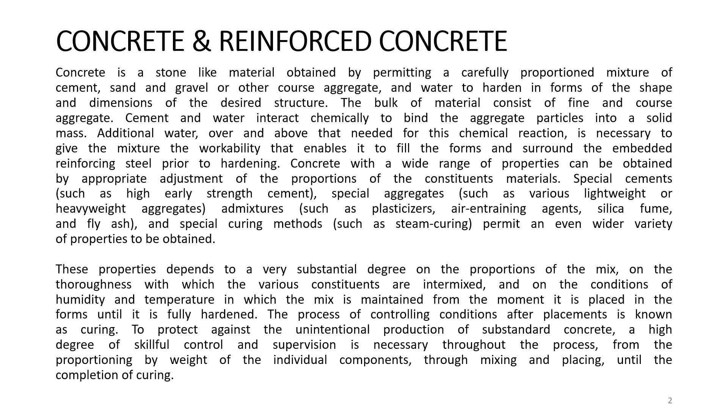Next, you know that concrete is weak in tension. That's why we will combine steel with concrete to take care of the tensile forces, and the steel reinforcement will be placed where tension will come up in the structure. Steel is a very high strength material, good in tension and also good in compression.

We will take care of the compression forces by concrete, and the tensile forces by the use of steel. But steel can also take compression, so when we need smaller sections, we will use steel in both the compression zone and tension zone. We have very high strength steel nowadays, starting from grade 60 and upward, so we will be taking advantage of these two materials.

They will combine together to make one member, and act in such a way that in the tension zone the steel will help, and in the compression zone the concrete will help; if we put some steel in the compression zone, that will also take care of compression. So we will use both materials wherever we need to take care of forces and stresses like tension and compression.

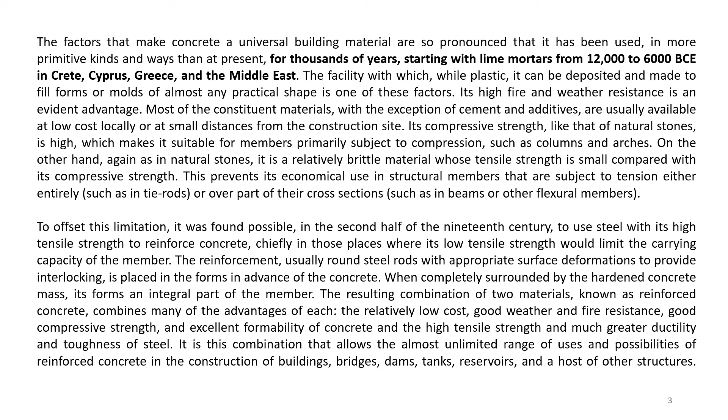In designing any member, we must know the loads. What load will be coming in this structure? There are load tables in the book. The author has given a long list of loads for designing the different structures, and I have chosen some of the important loads from that table. You can go through the original table in the books and see there are many items and many details of the load calculation, but I have picked up some of the major and important types of load with which we

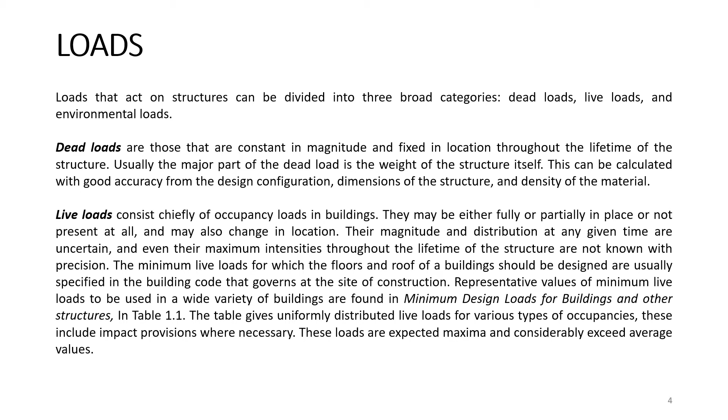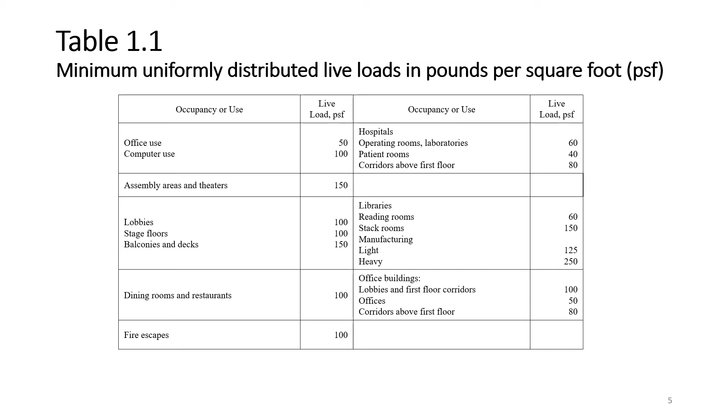will be designing structures. Normally the load will first of all be coming to the slab, and from the slab it will go to the beam and also to the column to foundation. Whatever it may be, a list is provided here from where you can get normal loads for common situations. This is given in table 1.1. There are 2 pages, and you can pick it up. Now we will go on.

Design basis. Previously, when we were designing in the working stress system, stresses were taken at a lower value, and loads were given as the exact load, and the calculation of moment and shear was on the basis of the original load. Nowadays, the system has been changed to strength design. Strength design means we will be increasing the load to give a factor of safety, but we will use the ultimate load of the materials.

Previously, the strength of the material was taken as part of the final crushing strength of concrete and tensile strength of steel. Nowadays, we go for the ultimate capacity of the material, ultimate capacity of concrete and ultimate capacity of steel. But as we go for higher strength, the load should be increased to give factor of safety. We increase the load and we take the full strength of the materials. By increasing the load from the actual load, we give the factor of safety there.

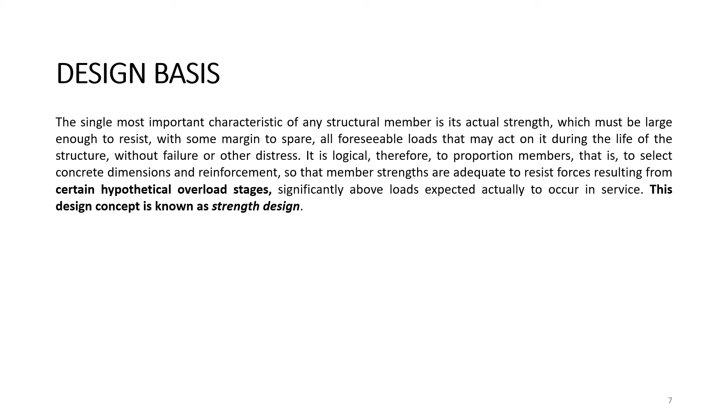In this way we design, and this is known as strength design. Strength means the full strength design. We use full strength of concrete and full strength of the steel reinforcing material, and from the probable load we increase it by some factors depending on the nature of the load, like live load, dead load, wind load, earthquake load, etc. Each of these loads have different factors. Live load is given a factor of 1.6, dead load is given a factor of 1.2, and wind load, etc. are different factors above 1. In this way we increase the load value from the actual load to get the factor of safety in the structure.

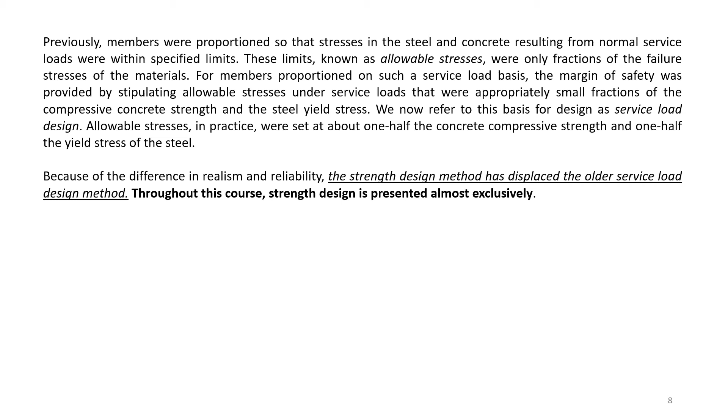In table 1.2, the exact values of the load factors, how much load will be increased for dead load and how much for live load. In the table it's written that for dead load you have to multiply it by 1.2 and live load you have to multiply it by 1.6. And if you have only dead load, then you have to multiply it by 1.4, and like that the other loads are given here for live load, dead load, wind load, snow load, etc. In normal practice in our country and in this course, we will mostly use the dead load and live load only. We will not bring in the earthquake load or wind load, because at this stage we have not learned about those magnitudes. Therefore, we will be limited to 1.2 dead load and 1.6 live load only.

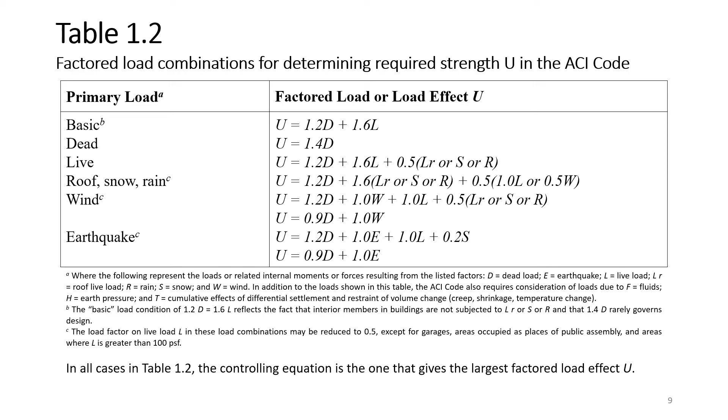So depending on the nature of failure, they have adopted a factor of safety, because failure in tension, failure in shear and failure in bearing are quite different from one another. That's why in bending they have given 0.9, in bearing they have given 0.65, and in shear they have given a 0.75 factor. These are the strength reduction factors. Whatever strength we get from the dimensions and the other properties of the material, you have to reduce these values by these factors. While working on problems and designs, we will refer to these factors and use them properly.

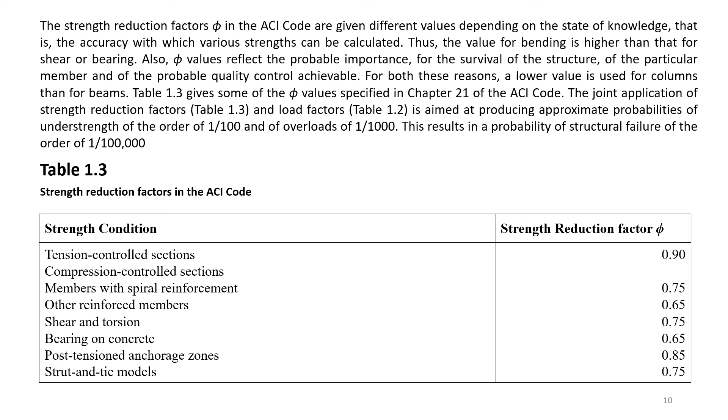For this course, we will be following Design of Concrete Structures by Nilson, Darwin, and Dolan, possibly the 15th edition. No earlier edition will do. The 15th edition is available in the market and is cheap. Only 150 taka will be sufficient for purchasing the book. So you should purchase a book for yourself for this course, and we will be following this book in 3 or 4 courses. Even in the final year we will be following Nilson's book for some courses. That's why you should take it positively and procure this book immediately.